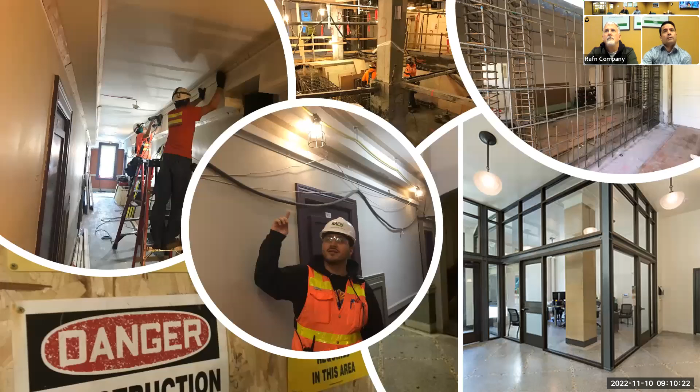Here's some examples of projects where this side of the hall was occupied while we're doing some of the work on the unoccupied side. Patrick talked about the historic or temporary enclosures that we used. You can imagine trying to have a resident on each side of their unit while we're putting in a concrete wall in between their unit.

One of the things we have in that picture on the left, where the guys are putting in the crown molding, we pick subcontractors—those are our own employees and subcontractors—we try to pick people that have the right temperament for this kind of work when you have occupied renovation. You have to be able to get your work done effectively, but also be nice to residents when they come out of their unit into the hallway. You have to be respectful of their time and space and still get your work done. So there's definitely a unique personality skill set required from our carpenters, ourselves, and subcontractors.

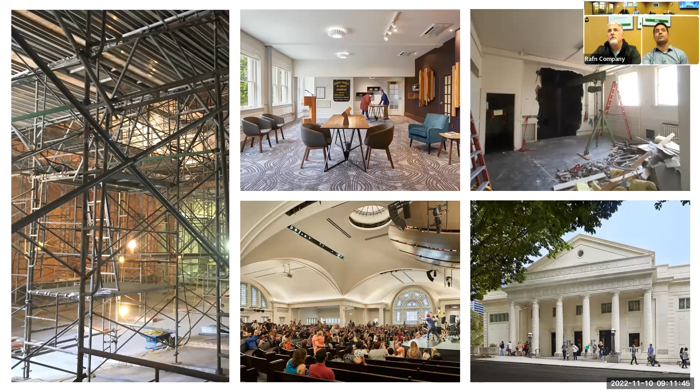Here's an example where unoccupied made the most sense: Town Hall, downtown Seattle. We had talked about potentially doing this occupied on the lower floor, still having performances while trying to renovate the inside of the upper area. It didn't make sense financially and just given the amount of work that needed to be done to make that feasible. We would have had office staff here while we're trying to blow a hole in their wall to get into the elevator pit. So this is a decision made as a team—program-wise, budget-wise, and work-wise—and it just made more sense for us to do this unoccupied.

Then we talked about having these old buildings—some are landmarked, some are just old. Some of the differences for landmarked buildings: there are different types of landmark projects. There could be a Seattle landmark, or the local landmark board, or national landmark status. So the key is to identify what specifically is landmarked, and then you build the project around dealing with those elements that we need to protect or restore.

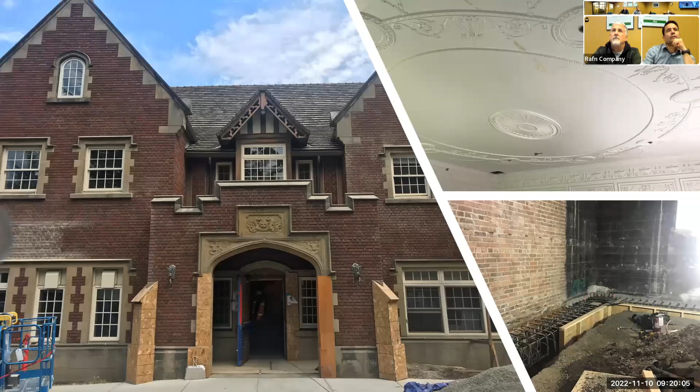These doors were also historic, so this was an example of preserving the doors and making new hardware work with the operation of the existing doors. This was a building that's just old, but the owner determined that what was important to them were the ceilings and the plaster. So the scopes of work were designed around protecting those - careful placement of any MEP upgrades, protection, and you can see on the outside the protection of exterior elements to preserve there.

Another distinguishing factor for historic buildings is whether it's commercial versus residential. For commercial spaces, the big thing is that it's a public space - there are services typically provided for, there's a reason it's there. Are they providing services to the community or a certain demographic? Those services still need to be provided, so the decision is: do we provide it within the space, or relocate services elsewhere? Similar to resident relocation - do we relocate services, or stop services for a period of time in order to do the work? That's a decision that needs to be contemplated.

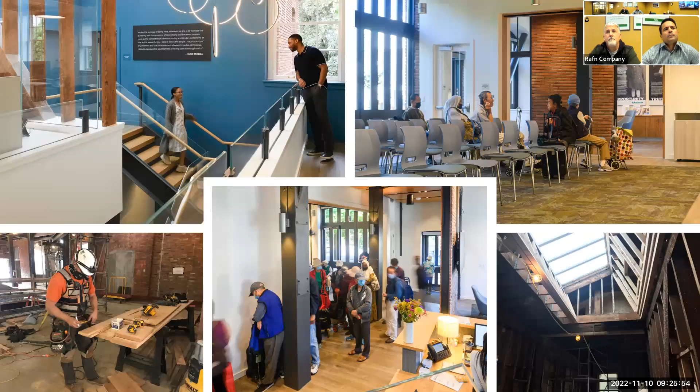This is a project we recently completed. It provided services for the community, and you can see people already lined up in the new space. Those services were relocated while we did the work, and that made sense for this project. This is a food bank, right? Yes, this is the Byrd Barr project.

Another benefit we uncovered was being unoccupied. In doing the work, we were actually able to open up more space, and we found an old skylight that we were able to refurbish and put back into use. That was an added benefit. And there were some ADA requirements that we were able to incorporate into this as we were doing the work.

This one was both commercial and residential, so on the first floor there was a museum, and then there were units above. This required coordination of some of the historic elements that were able to be achieved, keeping some of the exposed brick, but also working to determine energy code if we could do some work elsewhere to increase energy efficiency in order to keep the walls exposed. This project was already unoccupied, so it was just a plus in the renovation side of it.

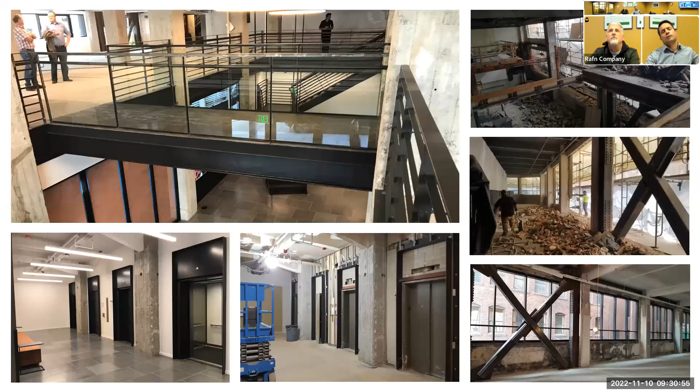This is an office building, and this was phased—Two Pine downtown. Some people might remember the old Nordstrom Rack building. There were tenants on different floors, so we had to keep the lobby and elevators operational during this time. This was over 2 to 3 years worth of work. Some tenants moved out, and then we'd renovate their space while they were out. There were advantages to that, but also advantages to keeping tenants in place due to leases and the income being generated.

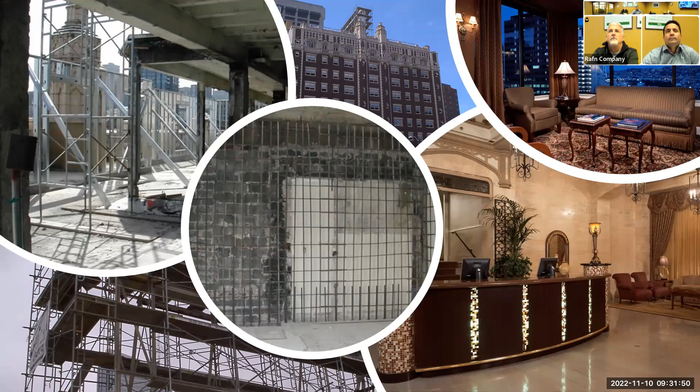This is the Camlin Hotel near the Paramount Theater. This was a Trend West project, and we did a study of whether it made sense to try to keep it operational while renovating, but the cost versus income didn't make sense, because room rates would have dropped significantly trying to get people to stay there during construction, versus the cost of just taking it out of the portfolio for 9 months, doing the work, and opening it back up.

So that's what we had. Some of our takeaways—I think my main takeaway is if we can do as much exploratory work up front on these historic and old buildings, it pays off so much in the end, so you're not having to redesign or rescope the work. Sometimes you find something that wasn't part of the scope of work, and then you're adding work. So as much exploratory work as can be done ahead of construction, yeah.

The other big takeaway is flexibility. Generally the projects come to us and we do some kind of rough order of magnitude pricing, and it starts out unoccupied—generally mostly start that way. The flexibility side is to keep an open mind that things will probably change, usually at the last minute. You might put a project together and schedule it with the building empty, and then for whatever reason—sometimes a funding source or lack of availability to move people out—the project changes and has to become an occupied renovation. The path from beginning to end is not usually a straight line with renovation like it is with new construction. So a big part of it is to keep an open mind and be flexible, realizing big changes will probably happen before construction, often at the last minute.

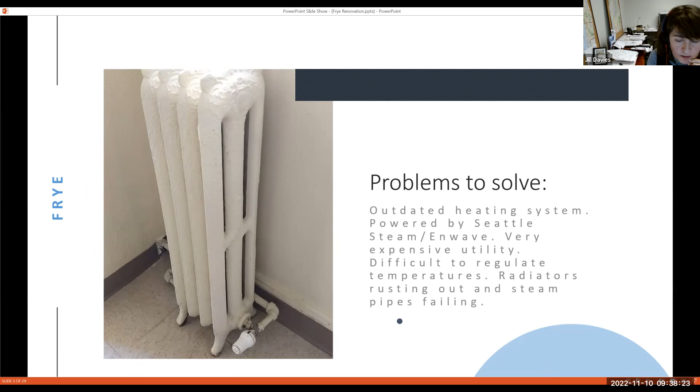The building was powered by steam. A lot of those steam pipes were leaking in walls. These radiators were all rusted out, really difficult to regulate on heat, and steam was an incredibly expensive utility. So we made a decision to pull all of that and go to electric cove heaters in the units.

We just had enough electrical capacity in the building to be able to switch over to this, it was really tight. We talked about a few different options on thermostats, and we ended up going with this one with King, which I can't remember what it's called now off the top of my head. I think the primary market for it is rentals, like condos and stuff.

Where people go in and they turn the heat way up, and then the idea is it sets itself back, so you're not paying for them to heat the hotel room at 80 degrees in perpetuity. So we decided that we would do a setback to 66 after 12 hours, and then a major setback to 52 after 48 hours. This is, you know, we're paying all the utilities at the Frye.

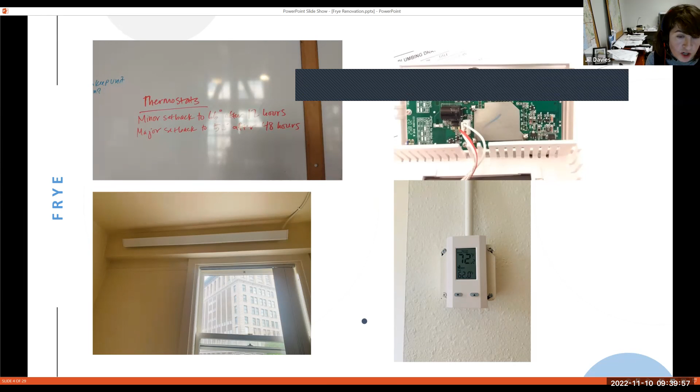People have a tendency to do just that. They turn their heat up as high as possible, crack their window, disappear for days on end, and then we're paying lots and lots of electricity bills. So I think this has helped us save some money at the project. It was a little bit of a learning curve with the tenants to educate them that if you want a certain temperature, you just got to get into the habit of touching the thermostat in the morning and touch it again in the evening, and then it'll stay where you want it.

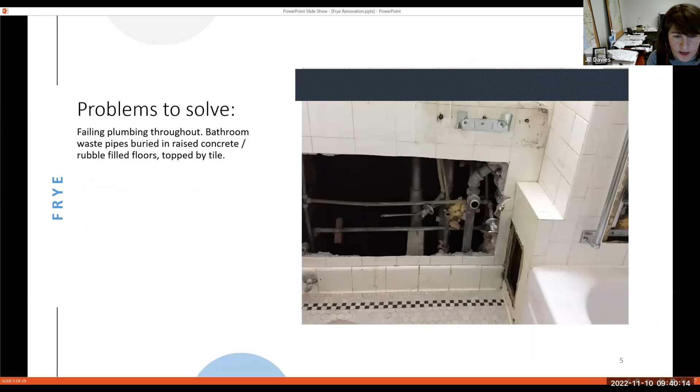We had original plumbing—it's a 1908 building—a lot of original plumbing buried in these beautiful old bathrooms. You can see on the left, those are some of the coolest bathrooms, which I really wanted to save, but there was no way to do it. The waste lines were encased in concrete and rubble under all this old tile, and they were failing. So really the only cost-effective way was for us to completely demo them out. One positive is that we had this step, which was difficult for a lot of our tenants, in almost all the units before, and now the bathrooms are all level.

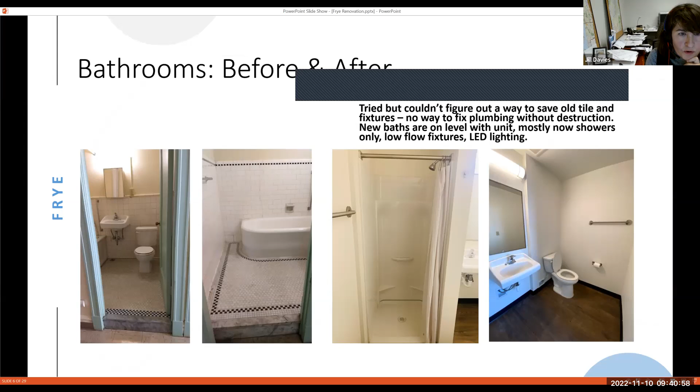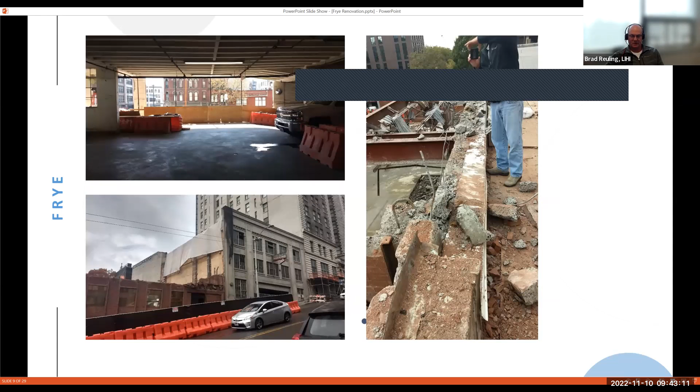Here's expect the unexpected, chapter 2. We had—our original budget had something like $350,000 for cornice repair work. We were expecting to just go in and find some pieces that needed to be repaired. Then as we began to look, it was in much worse shape than anyone had thought. So this ended up being about $2.7 million.

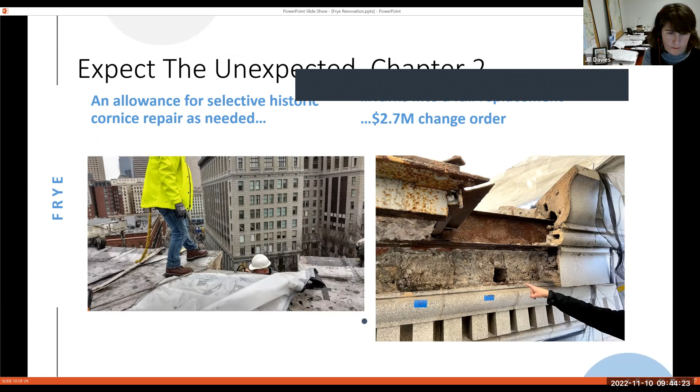We determined everything below Brad's head here was intact, and everything above Brad's head was in danger of falling onto the sidewalk below. I don't know if you remember the Prefontaine building, which is north of us—before we saw this problem, the brick parapet of the Prefontaine building collapsed onto the sidewalk, fortunately in the middle of the night. So we realized it is a real possibility that this could cause some serious damage. Rest assured, my head is intact. Yeah, we did not want anyone to get smashed down on the sidewalk.

That informed a lot of our choices, actually. When we were talking about the seismic improvements that needed to be done, we focused our money on the sidewalk sides. We thought a lot about what do we do to prevent somebody from getting smashed. So hopefully we made the right choices. I guess that will get tested at some point when we have our next earthquake.

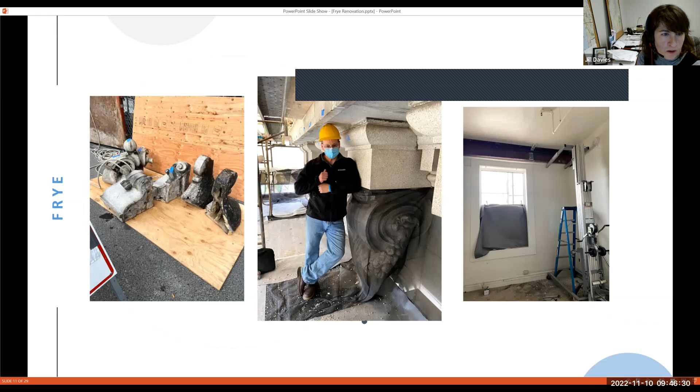More pictures of the cornice repair. Another thing around the cornice repair is that we hadn't expected to have to scaffold the whole building like this, and that was a big part of that change order expense, having to come back and put scaffold all the way up on both street sides. The terracotta that came off was so heavy there was no way to do it without scaffolding, and I think it was about $300,000 worth of scaffolding.

This is one of those properties in Pioneer Square that has a sub-basement underneath the sidewalk, and the sidewalk was not sufficiently strong to support the scaffolding all around the building. So we actually had to go back in and provide structural cribbing underneath the sidewalk to support the weight of the scaffolding. That cribbing is in place today because we didn't have enough money to repair the sidewalk, so that's for a future generation to do.

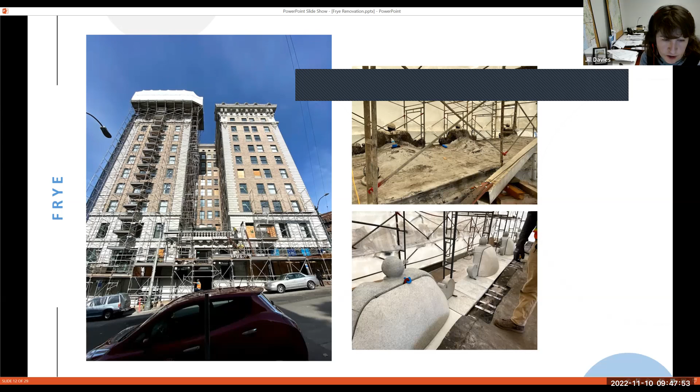You can see here on the right, that's kind of the before and after on the old terracotta, and then the new sort of faux terracotta there on the bottom. Again, scaffolding all the way up, lots and lots of scaffolding.

We had so many, I mean we had shenanigans down there in Pioneer Square - people climbing the scaffolding, breaking into the building, people who had been barred from the building figuring out ways to get in. It was a crazy, crazy time.

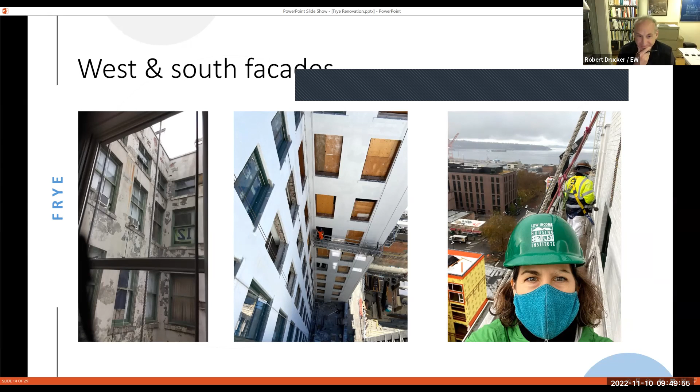And that's me helping check the paint job, being very brave and going outside on the swing stage.

More extensive repair to bricks. This is the south side, and you can see some of those areas where we were seeing the bricks start to bulge out because of the rusting underneath. So removing those to get to that steel, grinding that rust off, and then coating it with a coating to help protect it.

I'll talk about that more later, but because of the way that the Frye is constructed, this will be a problem for eternity, and there will always be moisture in the wall. The steel will always be rusting and scaling and swelling and displacing brick. A lot of this repair work was done 25 years ago, and you'll probably have more to do in the next 25 years. So that's the labor of love of maintaining a historic building like this.

Pioneer Masonry actually did the original restorations that far back, and we were lucky enough to have the same structural engineer and Pioneer come back and do this time.

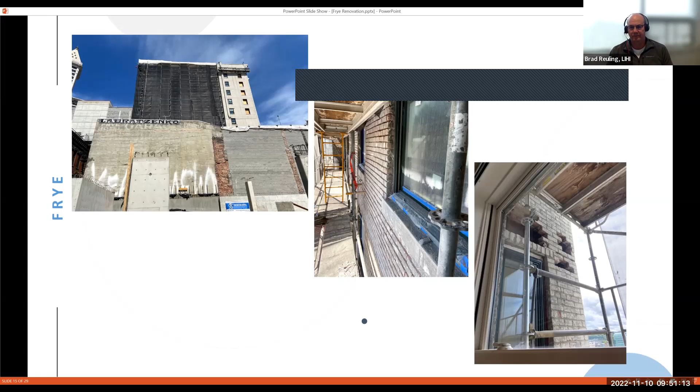I love this photo because we were testing different cleaners on the brick, and this is just how dirty it was. It really looks a lot better now, I think.

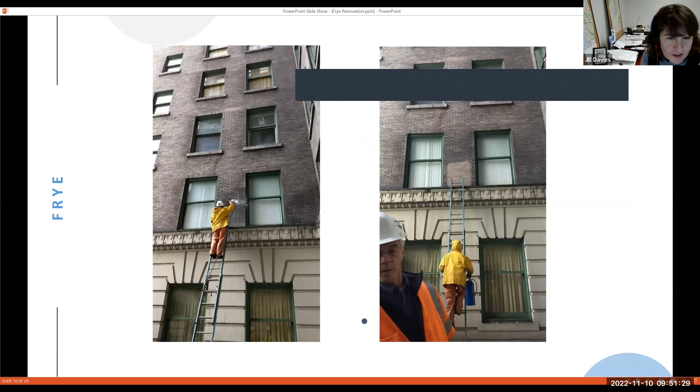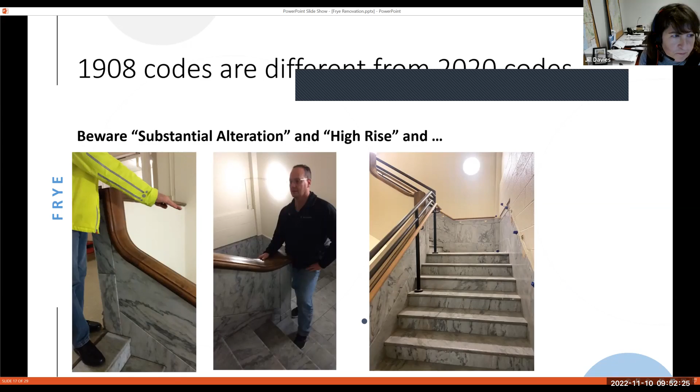We went in front of the Pioneer Square Preservation Board so many times. Robert is like an expert at it now. So we had to go and promise that we would put the window back exactly the same.

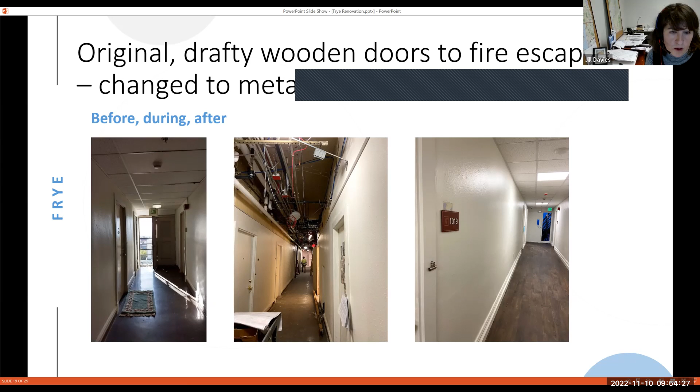We moved everybody in the building at least one time. All the existing tenants stayed. We worked with existing tenants to try to accommodate where they wanted to land in their final unit. And we continued to collect rents and subsidies during the whole renovation. Those were the pros.

The cons, of course, yes, much slower. Everybody had to be moved at least once, sometimes several times, depending on their specific situation. And we had, in a building like this, a lot of hoarding, a lot of roaches, a lot of bed bugs. So there was a real process to get these units ready for the general contractor.

Like I mentioned in the beginning, we worked in zones. I think this ended up changing a little bit, but the general idea is that we had approximately 13 vertical zones, and we would empty one or two at a time and move people forward to empty units in the rest of the building and get those units renovated.

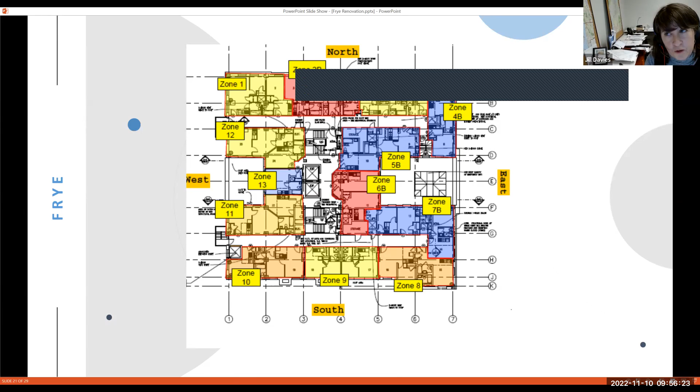Then we would move the next people, hopefully to their final unit, back into those zones that had then been completed. But sometimes it wasn't the final unit for a number of different reasons. We had different size units in this building, and different funding sources for some of the units. So it was a complicated puzzle.

Okay, good. Some tenants were really organized and able to kind of move themselves, and were ready on moving day. We did bring in some outside movers to help move from unit to unit, but other tenants just really struggled. We had an awesome team at the Frye, case managers and staff that had been there a long time and really had good relationships with these tenants.

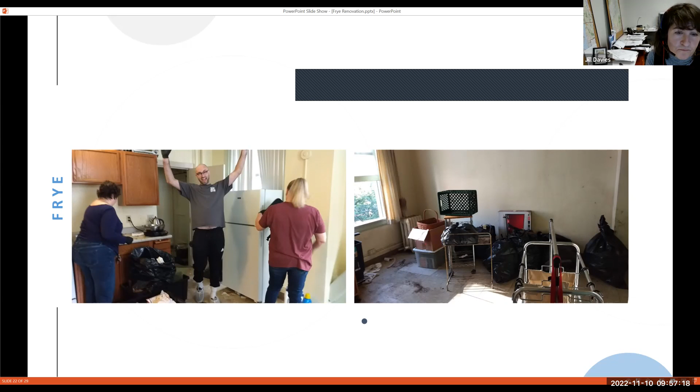A lot of times it was just a matter of, I'm coming today and I'm going to spend several hours with you and we're going to pack stuff up, kind of helping the process along. This is Hannah in my office. We had the whole building mapped out, unit by unit, sort of where people were going to land.

There was this whole method where the green Post-its were for their final unit, but the teal colored Post-it was if that was just a temporary jump unit and then they were going to land somebody somewhere else. We were taking pictures of this all the time because we were terrified that someone was going to break into our office at night and tear it all down, and we'd have no idea what was happening.

Just hours and hours of thinking about where people were going to go, checking in with them: are they ready? Did they turn in their key? Have they packed? Do they need boxes? Do we have movers lined up? Are we going to do it ourselves? A real mixed bag in terms of the process of moving tenants, depending on who the tenant was.

Lots of hoarding, lots of bed bugs. We had Paratex, a great vendor that worked with us. They were coming in weekly and spraying units. As we were emptying units, we tried to get them sprayed at least twice, a week apart, for bed bugs and roaches, so that by the time the contractors came in, nothing was still moving.

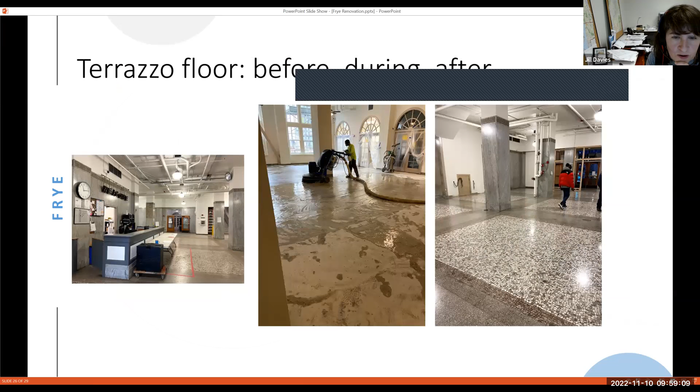This is the terrazzo floor in the lobby getting ground down. It looked really, really pretty after it was done.

I wanted to thank you, Jill. Brad and I were joking yesterday that just seeing these pictures is sort of re-traumatizing us to all the things we had to deal with for two years.

Ryan and Patrick mentioned historic building versus code, and that came up a lot on the project, particularly how we dealt with energy code. Given the steel deterioration we were uncovering, and given the prevalence of bed bugs in the project, we became convinced that full compliance with energy code—because this was a substantial alteration, which according to the building department meant furring out and insulating the interior walls—would be the death of this building.

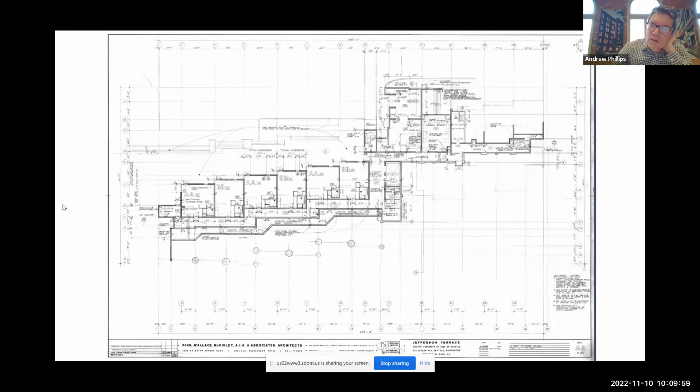It's built into the hillside, so this is the bottom floor, or the first floor, and it gradually becomes bigger as you go up the building until you get to the 6th floor, which is actually the main entry. And then the typical floor.

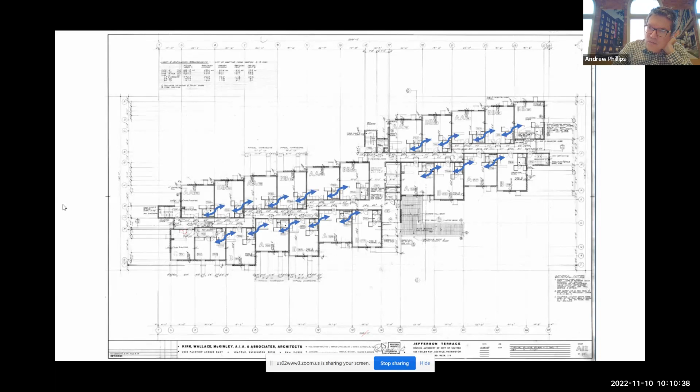The challenge was not only was it organized in stacks, it was also kind of daisy-chained through the building—the kitchen and bathroom of these two units are connected, and the kitchen and bathroom, and the kitchen and bathroom, and so on. So you couldn't just do this by stacks; you pretty much had to do it within the wings of the building.

So we analyzed it into 4 phases, but because the east wing had fewer units, we ended up sticking to 3. This was a very vulnerable population who lives here, many formerly homeless, so relocating people outside the building in order to vacate it was nearly impossible. So we settled on doing this one occupied, which meant it was going to be about a 24-month construction process that just started 2 months ago.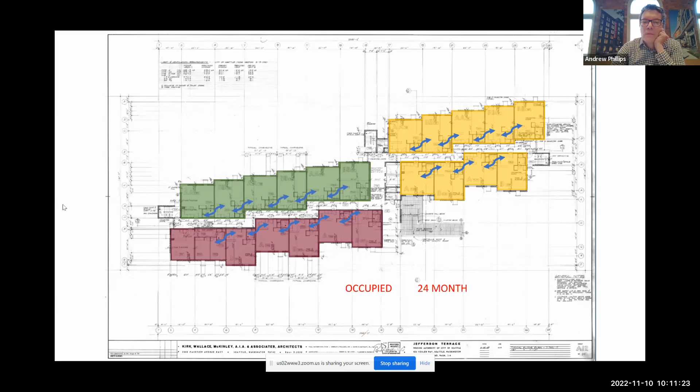The second project I was going to show is the downtown YWCA. It was built for the YWCA in 1915 by Gould and Champney Architects. It is a City of Seattle landmark, it is on the National Register of Historic Places, and will be going for tax credits.

The basic renovation would be to renovate 6 floors to create new studio and 1-bedroom apartments, and to do seismic upgrades.

The building currently is organized with some commercial and public areas at the ground floor, the YWCA's offices on the 2nd floor, and what is currently single room occupancies created over the last century—old hospital rooms from 1915, hotel rooms from a 1955 renovation, and a shelter on the 3rd floor for domestic abuse victims. It was just a mix of different unit types: some had bathrooms, some had kitchenettes, some were just rooms with bathrooms and kitchens down the hall.

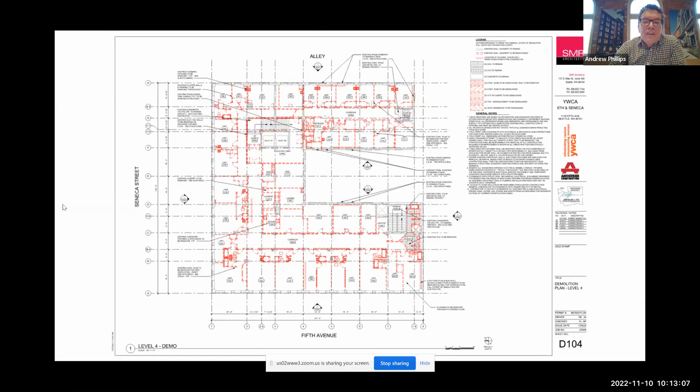So they wanted to basically gut the 6 floors. We're taking out almost everything and trying to create studio and 1-bedroom units with bathrooms and kitchens for each.

The new units would be organized by a stack of shafts that have both the plumbing and the ventilation in them. But our biggest problem was the seismic renovation.

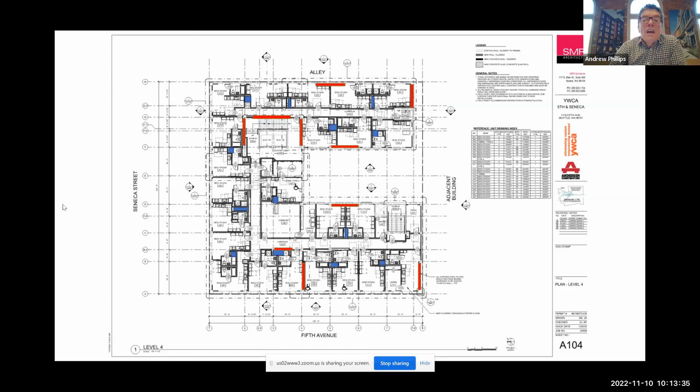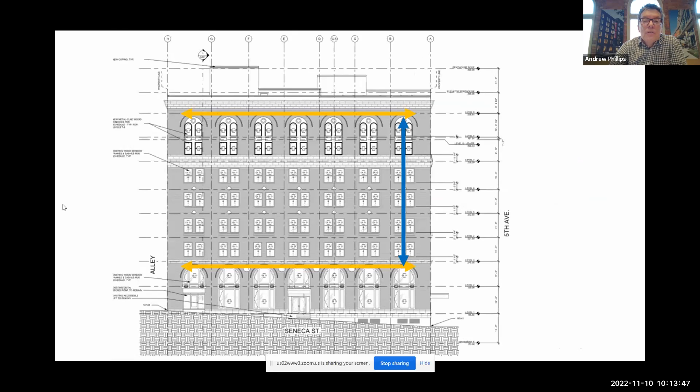While we could organize this as a phased project, using plumbing in an attic and plumbing at the 2nd floor ceiling to feed the stacks, unfortunately the seismic walls that needed to be installed—going up to the 8th floor, some to the 5th floor, some all the way to the roof—had to go all the way down to the basement. That just proved impossible to do as a phased project.

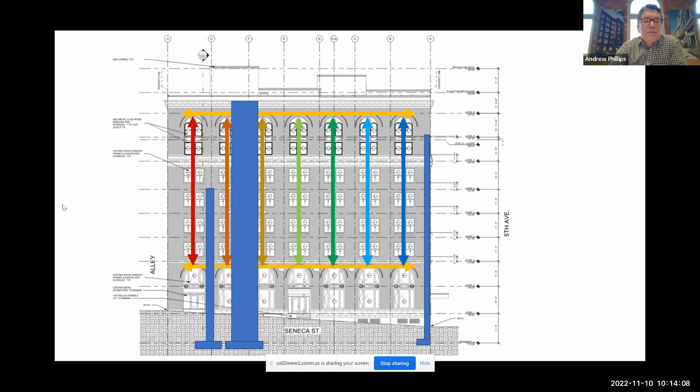So this one, we analyzed it in many ways. It was going to be an occupied project at 20 to 26 months long, but in the end we settled on making it a vacant building for 12 months and completing construction in a much shorter time, which saved about $4.5 million just in the schedule for the project.

Thanks, Andrew, those are very interesting projects. Is the YWCA built? Where is that in process? That is scheduled to go under construction next spring. Okay, all right, that's exciting. Yeah, I'm sure you'll uncover lots of stuff between now and then.

Are there other questions or other historic projects that folks want to share that they're working on, or enjoyed going through landmarks or the historic process?

No questions? Everybody's got this under control. I think we do have these valuable assets.